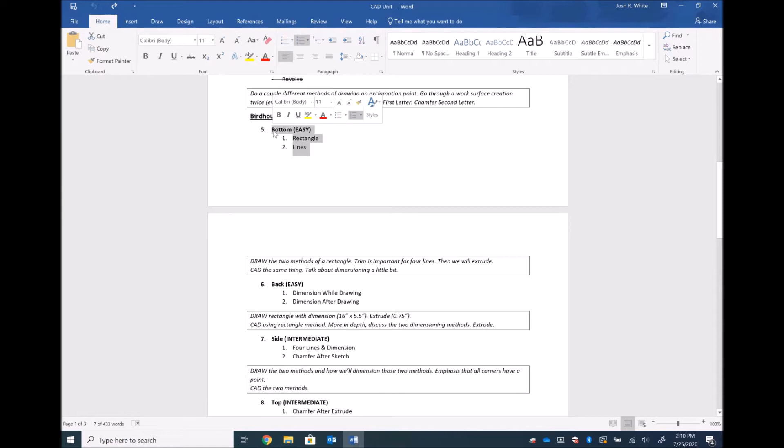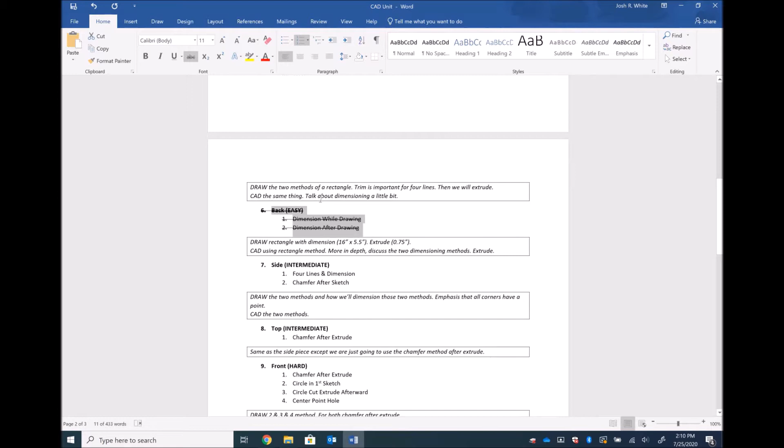So we have completed the bottom piece. We've learned how to create a rectangle out of the rectangle feature and lines. We've done our back piece. We've dimensioned while we draw with our text boxes, and we've dimensioned after we finished our drawing. We've done our side piece, with 4 lines and a dimension, then the chamfer after extruding our sketch. We have done the top, once again chamfering after extruding.

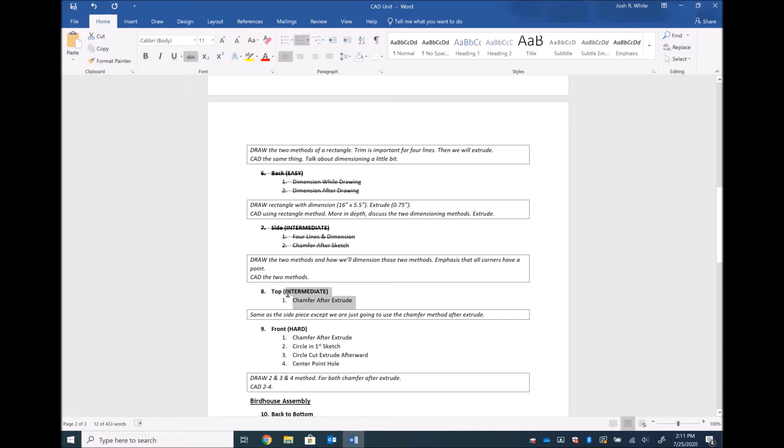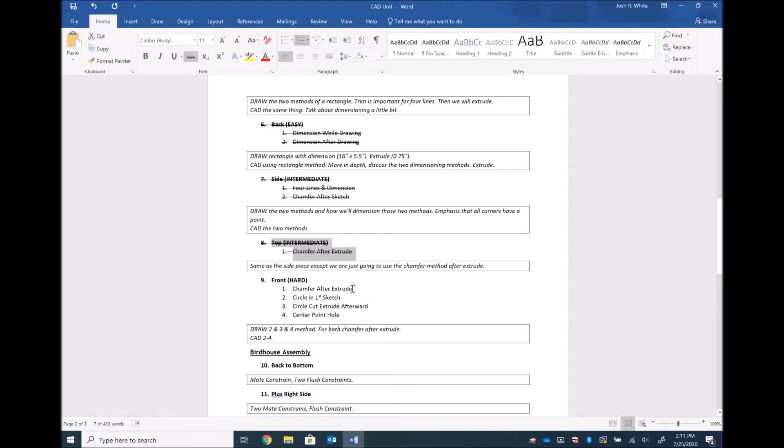So now we need to do the front piece. This is the hardest one. We chamfer after the extrude, pretty much for every single one. We can draw the circle during the sketch, cut extrude a circle after our first extrusion, or we could set a center point and then define a hole.

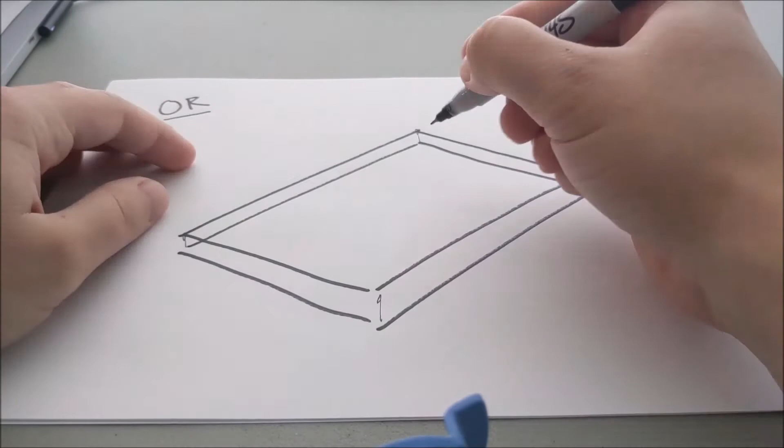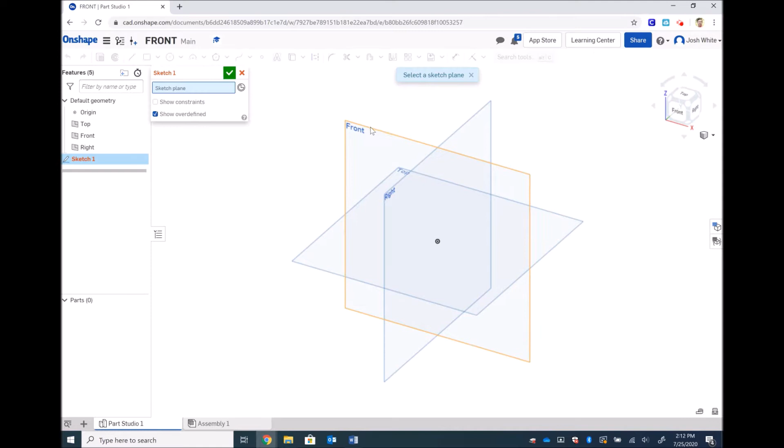So this one will be a bit more time intensive than our other ones. We will create a new document, call it our front. This is probably the most appropriate one, where we will choose the front plane. Then we'll choose the front of our view cube, and our overall, once again, is a rectangle. Our bottom is 5.5 inches, and then our length is 8 inches.

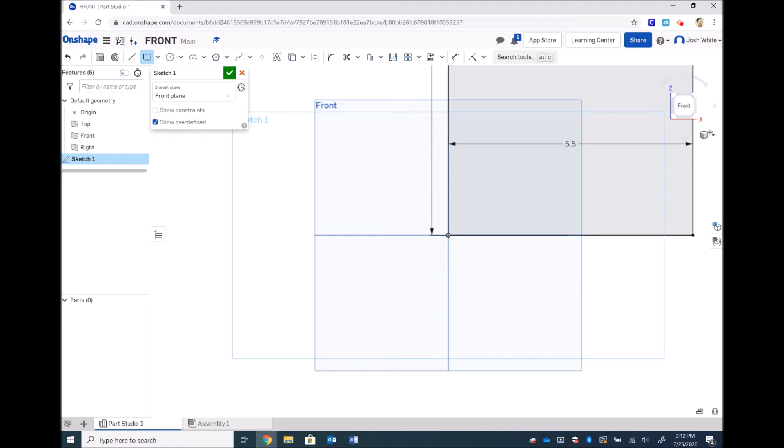And I'm going to draw in a circle before extruding. Now we need to set some dimensions for our circle. We need to set 3 dimensions: how big the circle is, and then 2 positional dimensions, how far it is from our x-axis and how far it is from our y-axis.

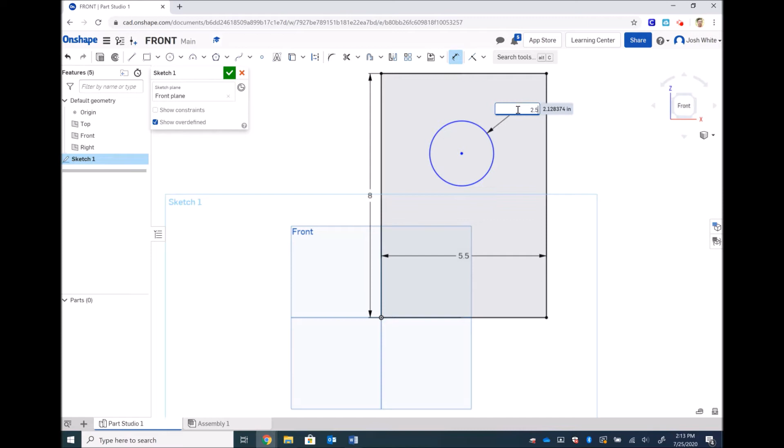So let's dimension our circle, and that dimension is 2.5 inches. It actually doesn't super matter, we can make it 2 inches. The only thing I care about is the dimension from the center point to, I'm just going to do the top because it's easier, and that is... 2.75 inches. No, it's not. It's 2.5 inches. I got confused with my own notes.

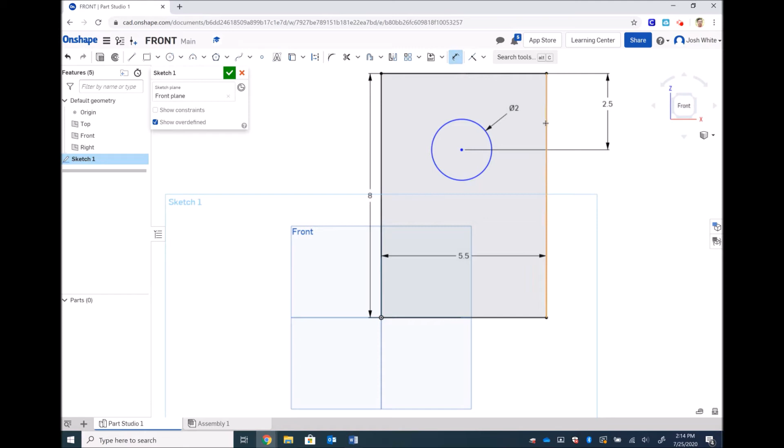Now our dimension from our side is half of 5.5. We know, because I put it on our drawing, it's 2.75, which is half of 5.5. If we did not know that, we could input a formula: 5.5 divided by 2, and that equals 2.75.

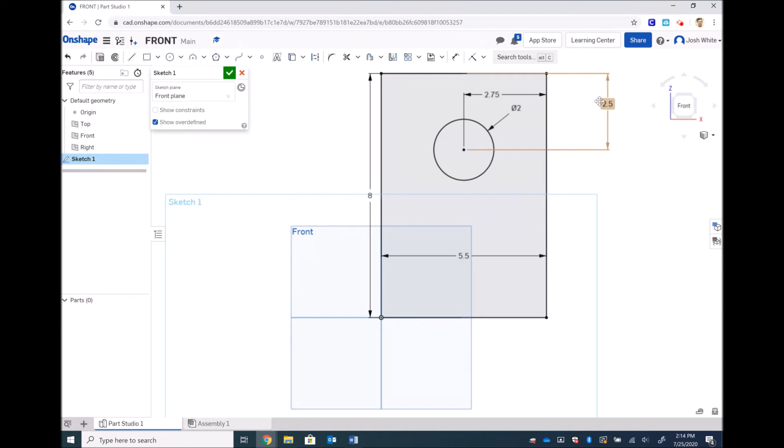All of our lines are now black. We have located our hole positionally, put a size to it, and now we can extrude our sketch. Now there are 2 features you could click on. You could click on the circle, but we don't want to do that. Or you could click on the outer besides our circle, and we want to make that 0.75 inches.

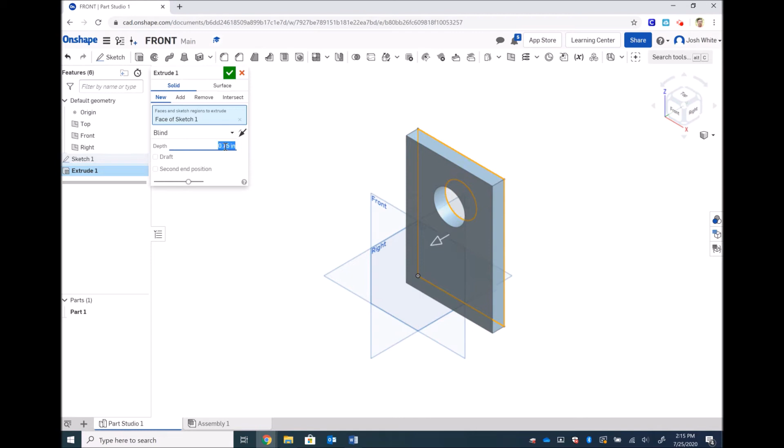And then we can chamfer just like we did our roof. If we want the roof to sit on it perfectly, we're going to need a distance and an angle, a 30-degree angle and a 0.75 inch distance. And then our front piece would be done.

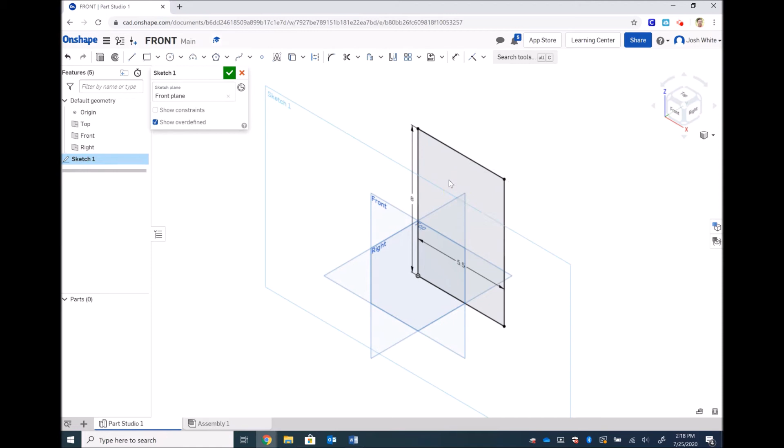Now let's show you a couple of other methods. We will delete the chamfer, delete the extrusion, go into our sketch, delete our circle, and then extrude our rectangle. After we extrude 0.75 inches, and chamfer with a distance and angle of 0.75 and 30 degrees, that will be our starting point for the next two options.

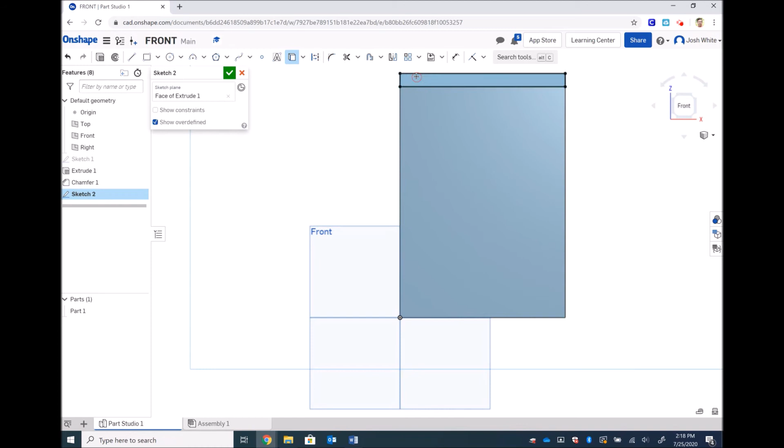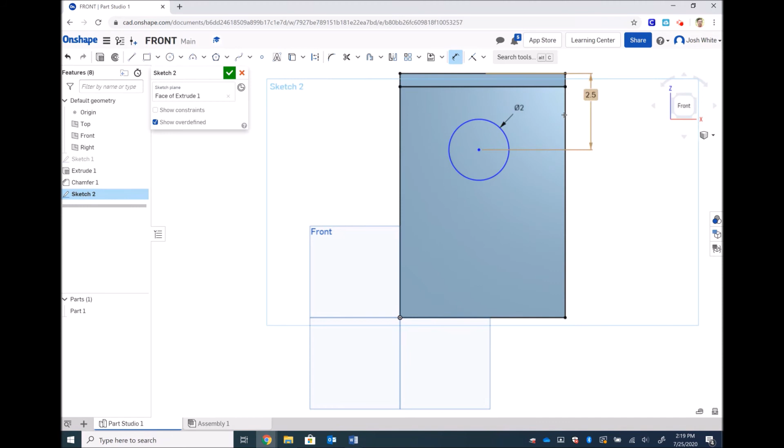So now we need to sketch from the front of our front piece. We will again project our geometry that we have created, so that we can tie dimensions to it. We can then dimension a hole size to be 2 inches, distance from the top to be 2.5, distance from the side to be 2.75. Apparently it will not allow us to do spaces and slashes, so we'll do 2.75.

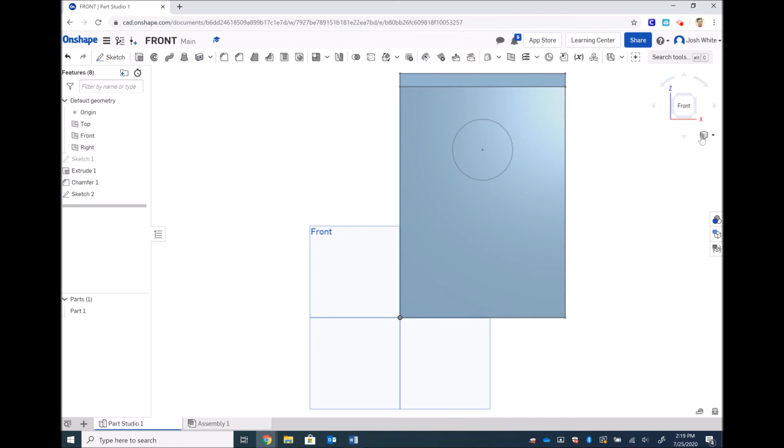And then we can cut, or remove, the hole. We'll just leave that 1 inch dimension there. And that's the same as what we had before.

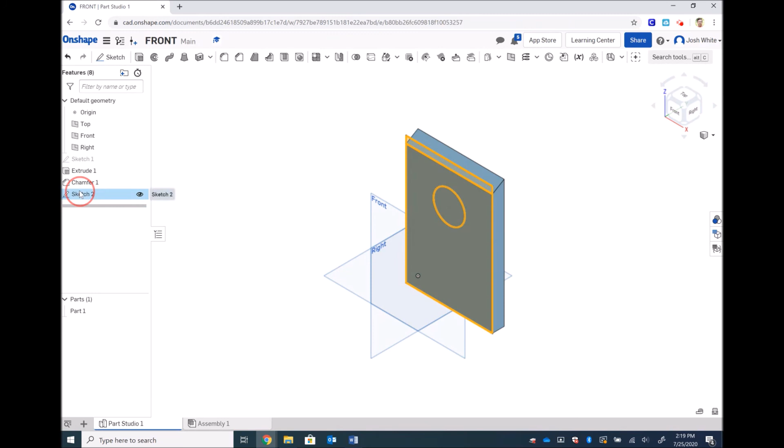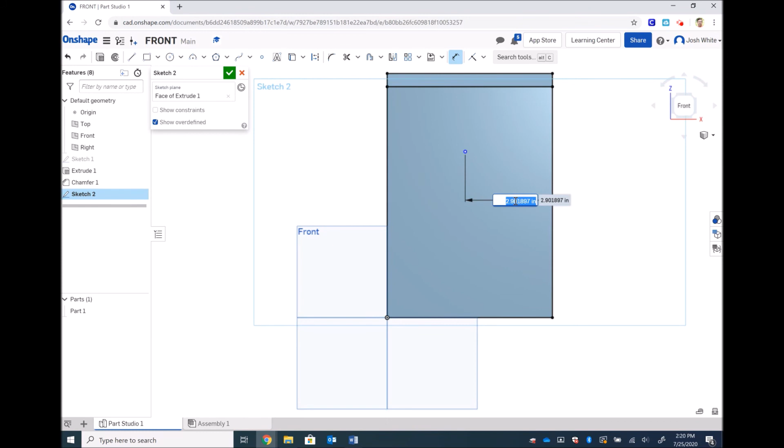The next way we can do it: we'll go back into our sketch, delete the hole, delete the circle, and then input a point. That's the point we want the center of our hole to be. Then we dimension the location just like we dimensioned the center point of a circle: 5.5 divided by 2. Dimensioned from the top is 2.5. We will finish that.

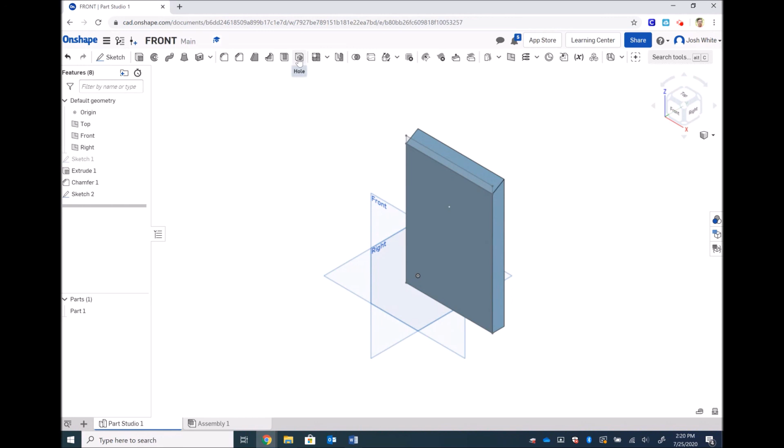And now we have a new feature I haven't talked about yet: a hole feature. We can select the sketch point to place a hole. That is our sketch point. And we want the diameter of our hole to be 2 inches. And that is all we have to do for the sake of this simple through hole.

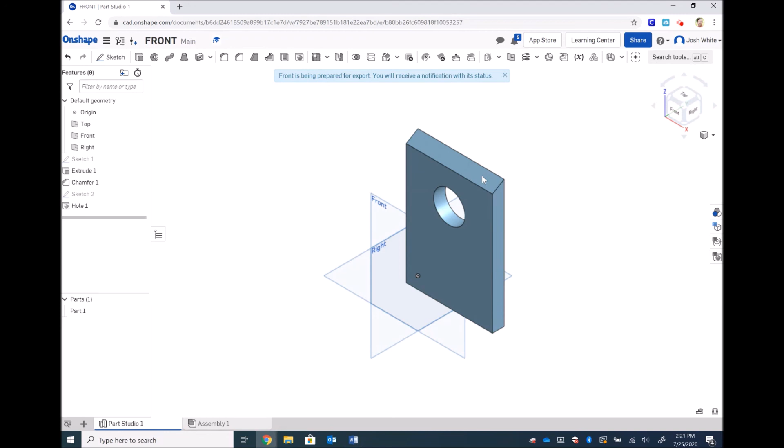After that, we are complete. We can export this, download it to our download folder. And then we can work on assembling our birdhouse. Congratulations, you finished all the pieces.